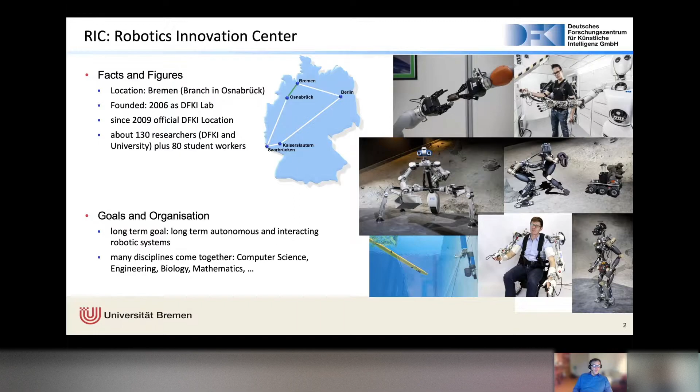So that's a little bit of history. I already talked about the DFKI in general. Actually, the DFKI is not the kind of institute you might know, especially from Germany. If you think of Germany, maybe you think of the Fraunhofer Gesellschaft, the Max Planck Gesellschaft, or the Helmholtz Society and so forth.

These are all big research institutions, actually families of institutions that have a very solid and quite big amount of basic-level funding from the government. But the DFKI is not that kind—it's actually a public-private partnership. When the government started this institute in the 80s...

...they said, okay, we want to have industry on board, and that's what's depicted here in this picture. Actually, the DFKI is a joint venture, a not-for-profit organization where the majority of shareholders come from industry.

You see Airbus, BMW, Bosch, Claas, Daimler, also SAP, Microsoft, Google, and others. They're all part of the board of the DFKI, and of course the key members also include the states, like Bremen, where locations of the DFKI are located. They are also part of the board, and of course the federal government is part of the board too—that's quite a unique setup for a research institution, this combination of industry and public partners forming the institute together.

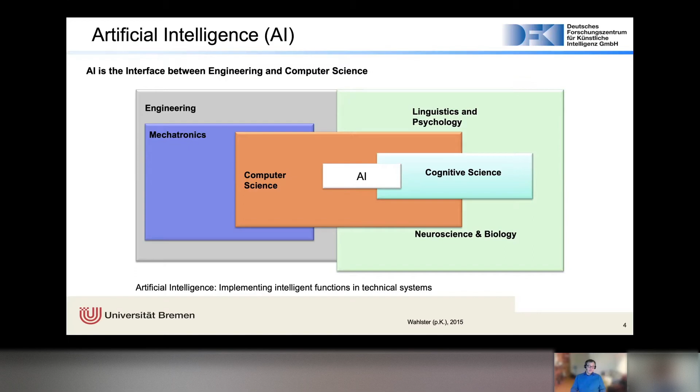So, to say this in advance, artificial intelligence really is at the core of engineering and computer science. The reason I say that is because if you look at the beginnings of computer science, Alan Turing is the person that has to be mentioned. In his paper 'Intelligent Machinery' from 1948, he was already establishing the key idea that still drives me today: that if we want to study artificial intelligence, we have to create artifacts that interact with a real world environment over extended periods of time, and that learn from that interaction. From learning through interaction with the real environment, they can steadily and iteratively improve their level of intelligence to become something we might call artificially intelligent.

Having heard that from one of the greatest mathematicians of the 20th century, which Alan Turing by all means was, we have to realize that there is no analytical way to tell us what is artificial intelligence first, and then there's no analytical way that tells us how to solve it. So there's nothing in mathematics, in pure mathematics as we know it, that can give us the solution for artificial intelligence. That's what a person like Alan Turing realized already in the very early beginnings, just after he basically laid the foundation for what computer science is. The Turing machine is still the machine that defines the capabilities of all the computers that we have, no matter how fast, no matter how big, no matter how fancy, they are all Turing machines. And we will never be able to go beyond what a Turing machine can compute.

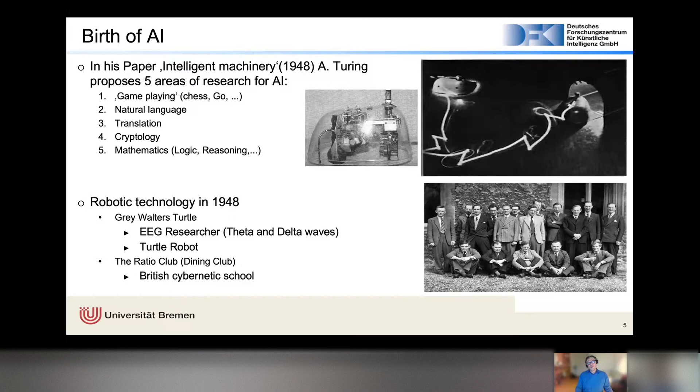So here's a little bit of some pictures. This is the little turtle bot here, and the thing up in the back is the hutch. This is how they did videos in the 40s - they were just taking a snapshot with a very long exposure time, and you can see the light traces, which is the path that the robot followed. Here's the path that leads the robot into his charging station, and then, as I said, coming out and doing his thing again.

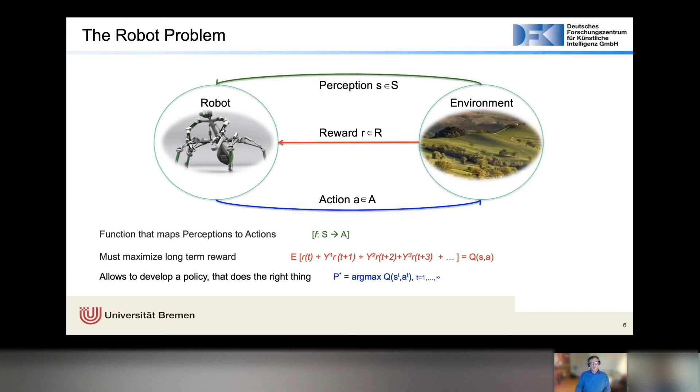So if we want to come up with these kind of systems, whether that's underwater, space, or wherever, we have four major challenges that we need to tackle.

One major challenge, and the most important and often neglected part of this problem, is structural complexity. What I mean by structural complexity is actually what Alan Turing already asked us to do: to come up with robots that have the kinematic disposition to interact with an environment in a non-trivial way.

So if you have a very simple robot, like I always call them tin cans on wheels, you have this trash can with two wheels underneath, and it's just driving around on a flat surface—that's not the kind of robot I'm talking about. That's not the kind of robot that Alan Turing had in mind when he was thinking about long-term interaction and learning from it, because you can only learn so much.

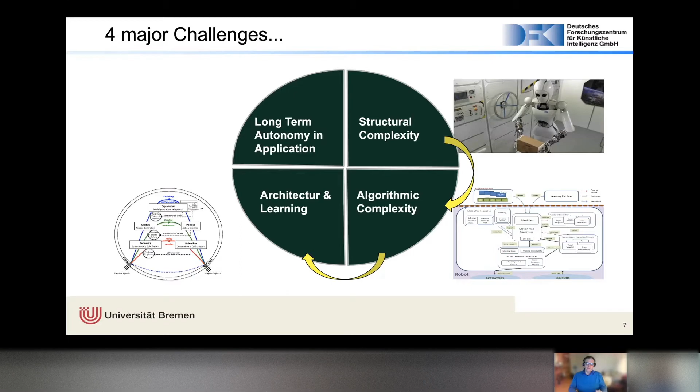Here the robot actually forms a circular connected chain by grabbing the parcel in the middle. If you have those closed kinematic chains, if you have parallel kinematics, if you have parallel kinematics in combination with closed kinematic chains, and if you have all this stuff together in the robot you see here, then the way we can classically solve the control problem is just no longer valid to us.

It's no longer available to us because it's too costly, and sometimes doesn't even come up with a solution at all. And there is the first entry point for learning in my approach, where we can use machine learning architectures, machine learning approaches, but also hybrid approaches to tackle this problem of dealing with the complexity.

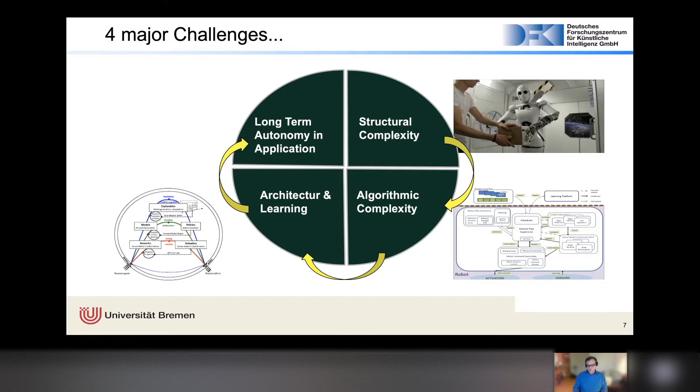And then once we did that to a certain extent, we can actually take this robot and bring it into a real world, into a real environment. This is just a picture here from a commercially available robot in a factory setting. And from all the experiences that we have, once we bring our laboratory robots into a real world...

It will probably survive 10 minutes.

And after 10 minutes, you see all the problems that you have in your robot. You see all the problems on your control side, on your mechanical side, on your electronic side, and of course, you also see all the problems that come with integrating all these components into one system that then has to survive the unforgiving nature of real-world environments.

And that means, and that's not bad, but what it means is that we have to go back to the lab. So we created something, we put it into a real-world environment, we see that there are so many problems, so we have to bring it back to the lab and start over again, maybe because we need another degree of freedom, or another sensor modality or something like that. And basically what you could think of is the circle is closing. We're going back to start.

However, this is not really true, because fortunately we are not living in a two-dimensional world, we're living in a three-dimensional world. That means when we close the circuit, when we bring our robot into a real-world environment and see all the problems that it has, we are going back to the lab, but on the next level. We have already reached another degree of understanding, another degree of being able to cope with complexity and so forth. And therefore, you can think of it not as a circle, always going in a circle. No, you can think of it as a spiral, that brings us upwards towards systems that are capable of surviving the interaction with the real world while at the same time doing something useful.

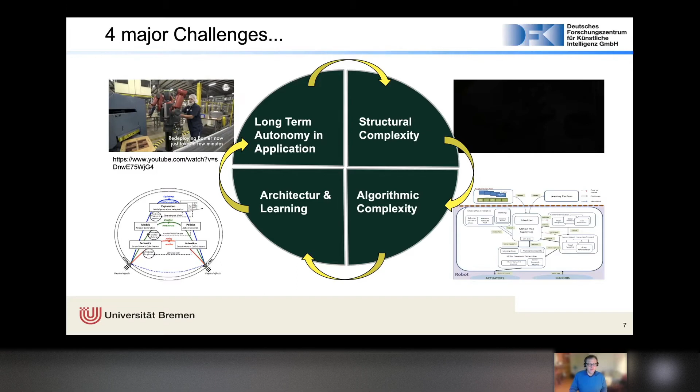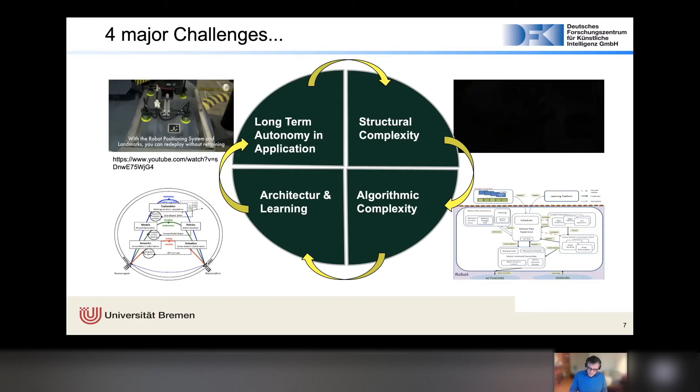So these are the four major challenges in my world, the way I see it, that we have to solve. And you can spend your whole career doing this. There's no way, and even more than just one career.

Okay, so for the RIC, the Robotics Innovation Center, we've set this goal, and here's a few of the application areas that we work on. There's space programs that we're working on, basically coming up with complex mechanisms for exploration of other planets, terrestrial exploration. Then, of course, the other big field is underwater robotics, which we'll be talking about for the rest of the talk, but also things like logistics, production, search and rescue robots, so robots that can navigate in unplanned, unstructured, maybe harmful environments.

Another very big field of research, and something that I'm really very interested in, is exoskeletons for assistance, but especially also for rehabilitation. So there's a big team in my institute dealing with exoskeletons for rehabilitation of stroke patients and also of spinal cord lesions. Very interesting field and also very useful field. But we don't have the time to talk about this.

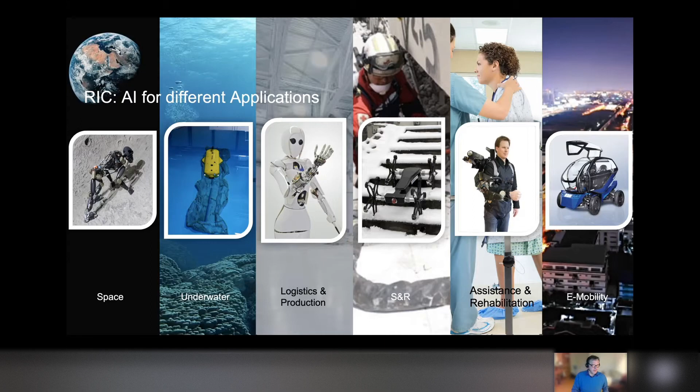So in the underwater area, I think there are several parts that are really interesting for us, and one of course is underwater navigation. So we all know navigation, probabilistic navigation approaches, the SLAM approaches from the terrestrial world. There's very early work that we did in the 90s already for probabilistic navigation. And that's one aspect that we're dealing with here in the upper left picture, to be able to navigate in an unknown underwater environment with a system, actually in this case a system that is just floating in the water column.

We then, in the lower left side here, brought this into an application where we build a system called the Flatfish that is supposed to be subsea resident. So very much the same idea as the turtle robot I just showed you. We have this little hut here underwater, on the bottom of the sea, and in this little garage, which is actually not so little, it's a big garage, the robot is positioned, and then it will go out from this garage on its mission plan, following, for example, the pipe. You can see in the small picture inside the video, that's the real world video, and the rest is an animation because we don't have the possibility to follow this robot underwater.

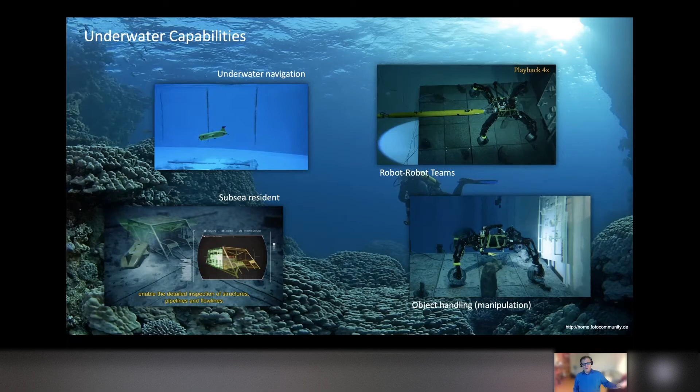One thing we can think of, if we talk to the underwater guys, is that this is really great because there's so much infrastructure on the bottom of the sea, especially in oil and gas, that we haven't seen for 30 years. When we dropped this stuff in the water, we knew it was there and working, but ever since we couldn't have a look at it because it's at 5,000 meters water depth or something like that. So there's no way we can actually go there.

With these underwater systems, we can actually go there. We can take the sensors that the system has, come up with three-dimensional reconstructions of the infrastructure, and these reconstructions can then be inspected and monitored by operators on the surface, who can take care of it and say whether there's need for repairs or not.

The basic idea, still in the lower left video, is that the robot basically goes back to its garage and docks into it. Then we have the possibility to transmit data to some onshore operations center where the data can be analyzed, and new missions can be planned. And that's all about navigation.

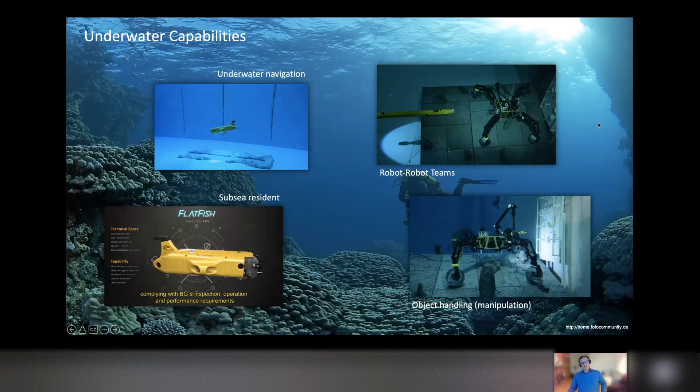But then, if we come to the right side of the videos here, we also have to think of other things, because just swimming in the water column and observing what's going on is nice, but in many cases we actually want to intervene, to manipulate stuff. That's what we see in the lower right video: a robot driving on the bottom of the seafloor with an underwater manipulator arm.

This arm has also been developed in our institute by the mechanical and electrical engineers, and it's able to operate at up to 6,000 meters water depth, doing things like turning a handle or similar tasks. So intervention is the next big challenge in underwater autonomy.

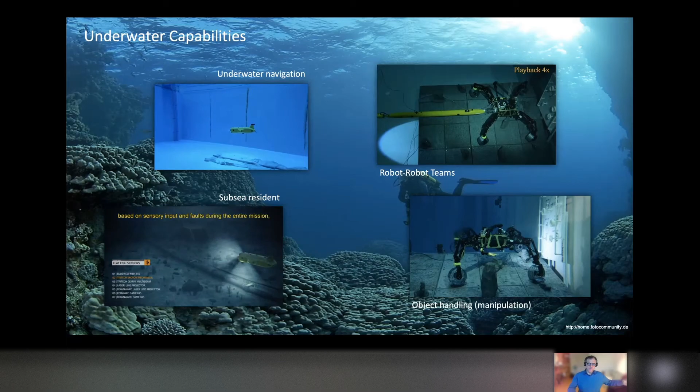If you go up one video here, you see two systems, and the long torpedo-shaped system is actually docking to another one. That's robot teams interacting underwater for whatever mission plan they have—for example, one robot picks up a sample, and the other comes and docks to it, takes the sample, and brings it back to some other station where it's further analyzed.

This is what we've been able to show here—I think the first time this has been done—where two robots underwater actually perform what they call a rendezvous and docking maneuver, like in space.

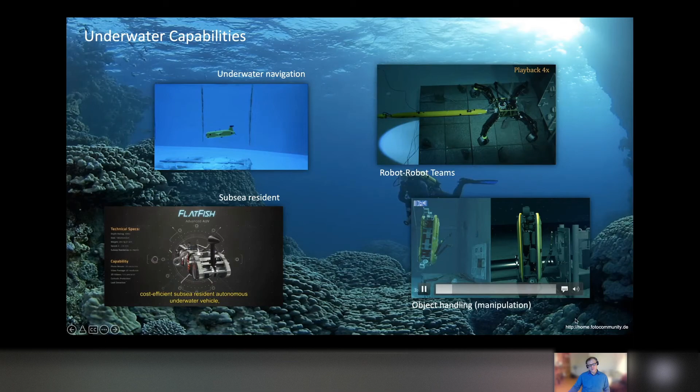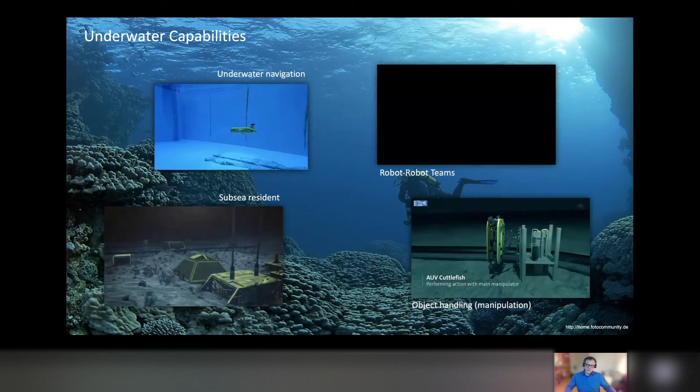So I think the next video here is something I wanted to show you. In the lower right side is another system that's just been completed—we call it the cuttlefish robot. It's a robot swimming in the water column, but it has two manipulators attached under its belly. It can change its position, as you've seen, to a vertical position in order to use the manipulators for manipulation, and that's the simulation.

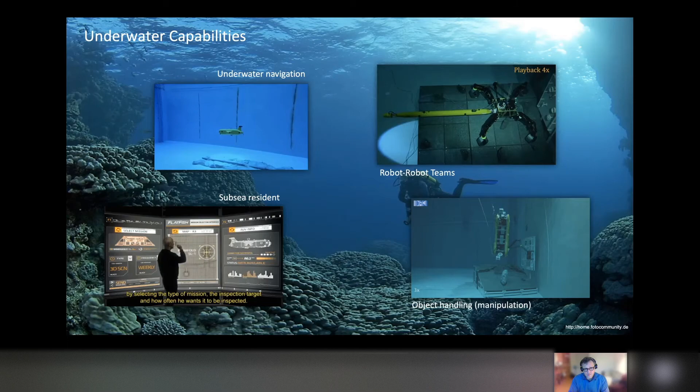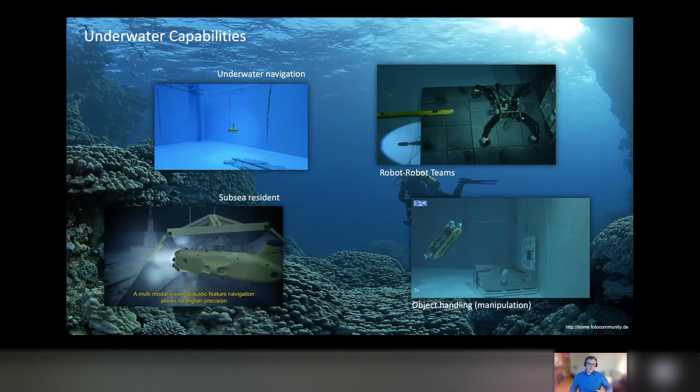And here is the real-world image of that, taken in our tank at the University of Bremen, at the DFKI, in our big underwater tank, where we can do these experiments, testing, and real-world hardening of the algorithms and the complexity. So this is another step towards being able to handle the underwater environment on many levels, including manipulation as well—not just navigation, but also manipulation.

So for the students in the audience, I think I would like to show you a little bit about the infrastructure that we have here at the Institute.

On the left side, you see many different robots that we have, but there's also an interesting aspect: we have two test sites. One is the in-house test site, the lower right video, this is the big underwater test basin where we can install pipes and stuff like that in order to train the systems to detect the pipes.

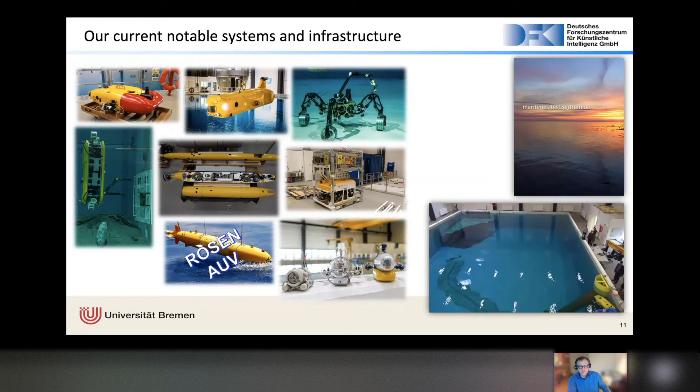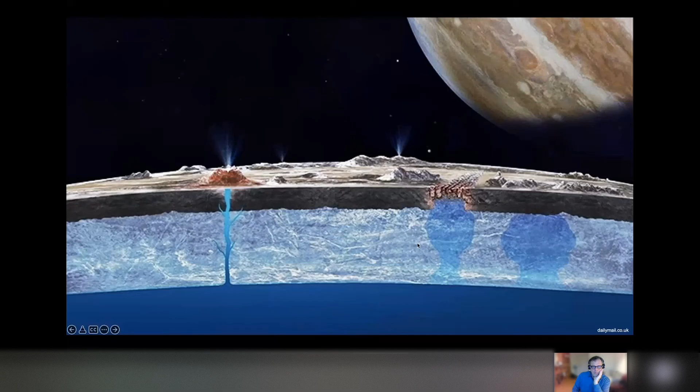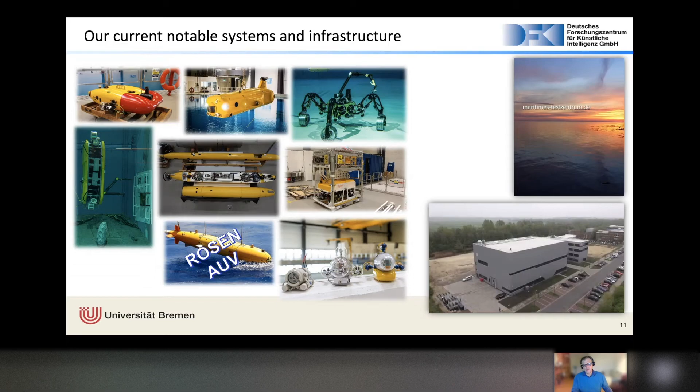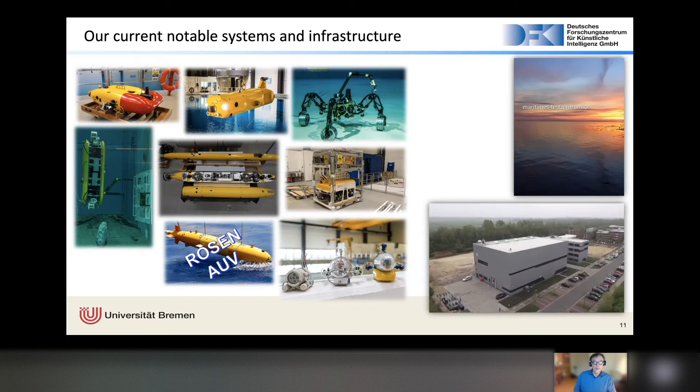But then we also have a real-world test environment on the island of Heligoland, up here in the upper right video. This is an island about 30, 50 kilometers off the coast of Germany, where we have an outdoor environment and also some lab spaces there, so we can stay there for a week or two and take the robots, bring them into this real world environment, do some testing, and then analyze or repair the robots in our lab space. So that's very useful to make the step from the laboratory environment into a real world environment.

Finally, I would like to show you a few things based on the combination of space and underwater. In different programs, funded from the German Space Agency and now also the European Space Agency, they're looking into ways to have missions to icy moons around Jupiter or Saturn, Europa and Enceladus. These are moons covered by a huge, thick layer of ice, and underneath the ice we now know there's an ocean of liquid water, up to 100,000 meters deep, much deeper than sometimes we see on Earth. Fortunately, the moon is very small, so the pressure is relatively low compared to what we find on Earth.

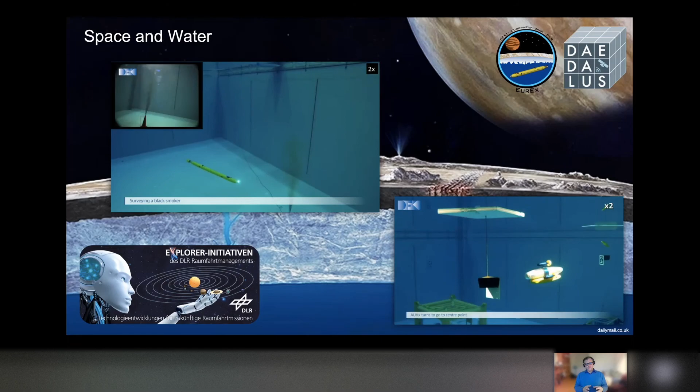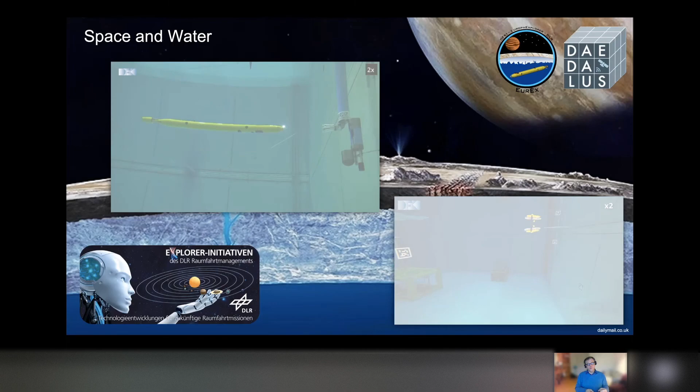The challenge, of course, is to have systems able to penetrate the ice surface. Once they've penetrated the surface, we also need to explore the environment, because people think that the cores of these moons are actually hot, melting hot, like the Earth's core itself, with melted stone material, so there might be what we call black smokers. That's depicted here in the upper left video, these are little volcanoes in the deep water environment at the bottom of the ocean in the Pacific and so forth, where material comes out that is very high in chemical elements that organisms can live off, even though there's absolutely no sunshine. They have a way of using chemical interaction with these materials coming out of those black smokers to live.

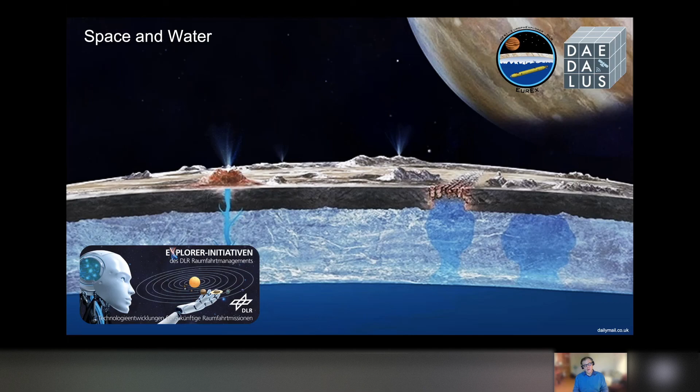And of course, the idea is that even on these icy moons around Jupiter, for example, there might be such organisms as well. So we need robots capable of first penetrating the ice, which is sometimes up to 10, 20 kilometers, a huge, very big ice layer. But then we have the liquid ocean, and then we need the underwater robots, the stuff we are working on here on Earth.